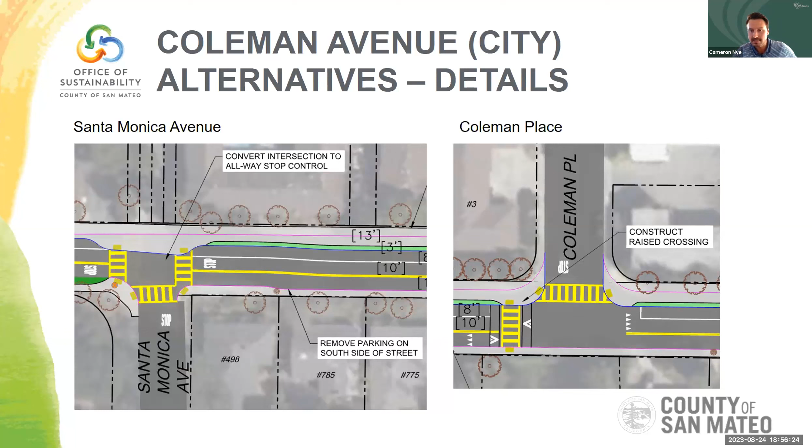Coleman is divided, partly within the city and partly within the county. The same process carried out throughout the city was also done within the county section. I won't go into as much detail on the county side, but I want to make you aware that alternatives were developed there. The two alternatives within the county include one that is a bike lane alternative.

So the street would be widened and Class 2 bike lanes would be provided, and then an asphalt pathway that would meander to avoid as many trees and existing encroachments as possible would be provided on the north side of the street.

And then in comparison, the bottom alternative there is a bicycle boulevard. Because there would be no street widening there, we have a little more space to provide a wider off-street pathway on the left side of your screen. So the difference is bike boulevard versus Class 2 bike lanes, and a narrower versus a wider off-street pathway.

And then within Ringwood Avenue, these cross sections are specific to Menlo Atherton High School, where you have an existing bus stop. Ringwood Avenue does change characteristics from the high school moving further north, but for the purposes of this cross section, there's much more to consider adjacent to the high school, so we use that as one of our focus areas.

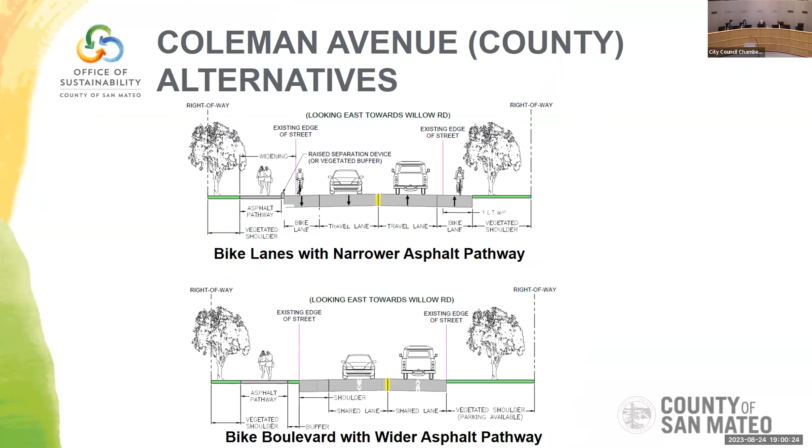Hello, thank you very much for the presentation, it was very informative. I just wanted to look at the map for a moment—not the study map, the map of the area with the very simple view in the beginning where it just had Coleman and Ringwood. You could sort of see them. So I just wanted to ask a few questions.

Because just with this information alone, it's clear that these are really vital corridors for children and young adults going to school. But my understanding is that Laurel is now split between two campuses—that wasn't mentioned, but I think that's on the other side of Willow, is that correct? So there's even more. I think that's worth noting because it provides information that Coleman is critical to that thoroughfare as well, Laurel on one side, Laurel on the other.

The other thing is my son went to Hillview Middle and a lot of his friends lived down by Bay Road. So in addition to the Menlo-Atherton traffic coming down there, there's also Hillview—lots of kids biking to Hillview, starting down in the Bay Road area and biking down Ringwood. So that's another school involved in creating these corridors for bikers and walkers going to school.

The other thing—it's my understanding that Coleman is a thoroughfare as well for school buses, is that correct, the yellow school buses? There's some school bus use of it, and I think also a Samtrans bus that uses it as well.

So speaking to Coleman right now, it's clear that it is a very highly utilized, multi-use, diverse use corridor with a lot of competing uses. And with that being said, I do want to reiterate that the goal of the study was to improve mobility and safety for all roadway users, and it does seem like there are many types that need to be taken into account.

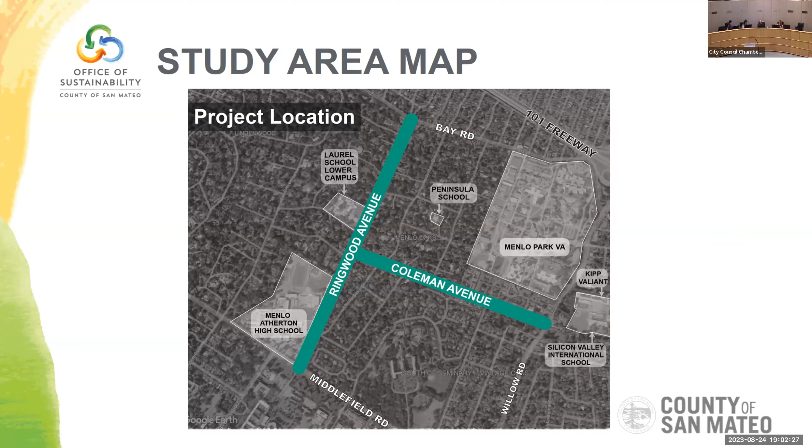I have a couple clarifying questions. When we talk about alternative 2 for Coleman, you use the term Bike Boulevard a lot. How is Bike Boulevard specifically defined other than a normal road? I mean, it's a shared space between bikes and cars. Does Bike Boulevard have other specific characteristics that make it a bike boulevard, or do we just call it that because there's not a bike lane?

Yeah, that's a great question. We actually have a definition in our general plan that we can pull up if needed, but more generally, what we're trying to achieve with a bike boulevard is where bikes and vehicles need to share the space, where they can't be separated or we don't think it makes sense to separate them. We're trying to manage speeds so that sharing can happen more safely. That's why there's quite a bit of traffic calming in here, to bring speeds down so they can still share space, if not separated.

Okay, my next clarifying question. In alternative 2, if the sidewalks get expanded wide enough to accommodate both walkers and bikers, would that be a formal designation, or just de facto allowed because it's wide enough? Would there be signage? Would there be an actual bike path on the expanded sidewalk, or just a big shared space that anyone can use?

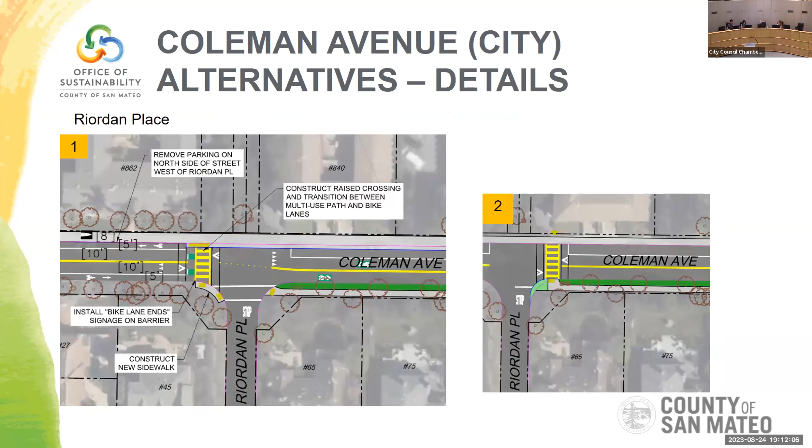So, Ringwood by MA, I noticed on the map of the intersection with Ringwood and Middlefield that there was a green, crosswalk-type marking on the north leg of the intersection across Middlefield. Is that what we're thinking bikes are going to do? No, that's for pedestrians crossing Middlefield.

You're talking about the plans that were attached, page 31. What I'd say is anything shown on Middlefield isn't necessarily accurate, this study kind of stops on the Menlo-Atherton side of Middlefield.

Let me get back to my questions, sorry for taking so much time. This was important, unfortunately not in the presentation today, but in the slides one of the driveways to the school disappeared. There are 3 driveways; there's one next to the tennis courts, and that one doesn't seem to have a crossing in the bike-ped vision. I'm wondering if that was an oversight.

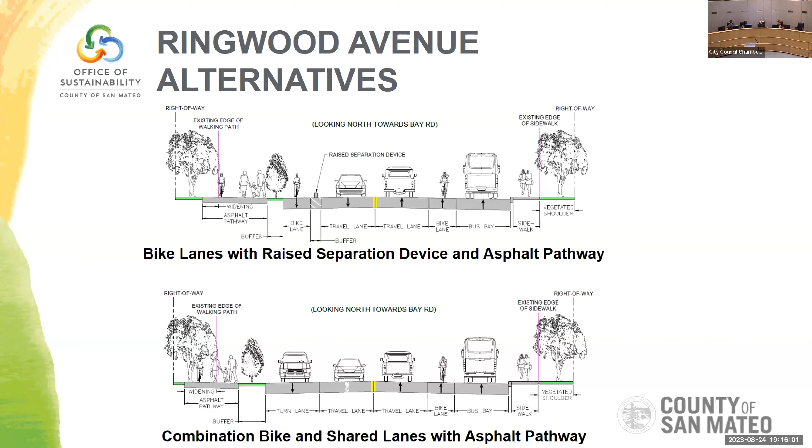I have one question, can you put back the slide at the beginning that had the goals of the project? I was just looking for what I recall was somewhere in there, where we were trying to emphasize looking at the active modes, because I couldn't remember where I saw it. Thanks.

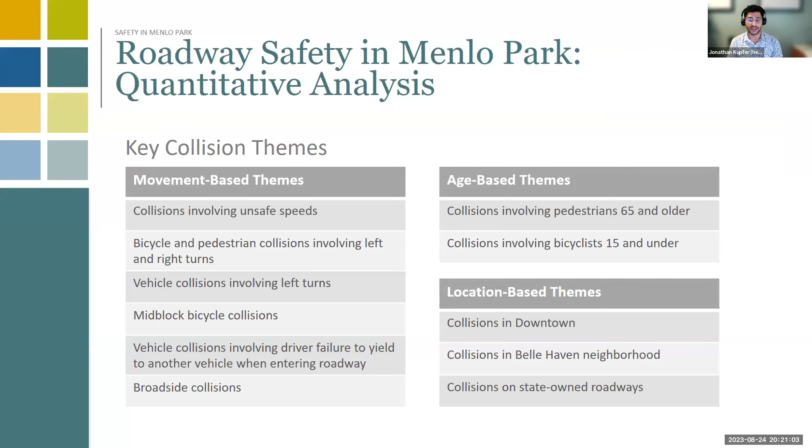From our analysis of collision themes and mapping, we identified a set of citywide emphasis areas to help us organize the strategies we're going to recommend to address these safety issues. This approach helps us be more proactive. So rather than just applying safety strategies to locations that have seen collisions, we can understand what types of locations see different types of collisions, and then identify a set of countermeasures that can be applied to all of those locations.

So what is a safety emphasis area? An emphasis area describes a set of roadways that are similar in terms of use, speed, adjacent land use, or other characteristics. Each emphasis area sees similar types of collisions based on the themes we shared earlier. And because they see similar types of collisions, we can use similar countermeasures—typically design, engineering, policy, or education-based tools—to help reduce the crash risk in that emphasis area.

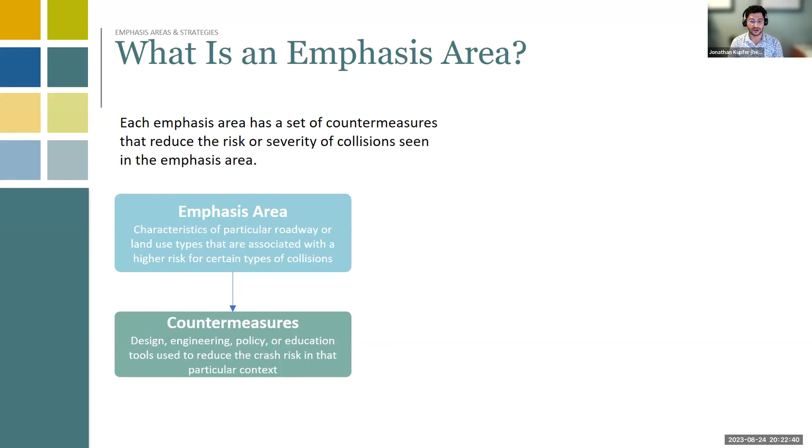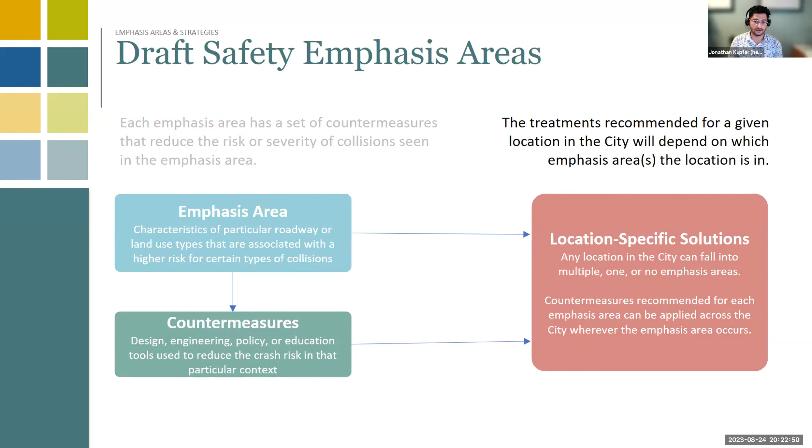The recommended treatments for a specific location in the city will depend on which emphasis areas that location is in. These are the 5 draft emphasis areas identified from our analysis: state-owned roadways, including freeways and El Camino; city-owned higher speed roadways; lower speed roadways; intersections; and school zones, or areas within 1,000 feet of a school.

With that, a question we'd like you to think about is how these emphasis areas sit with your understanding of roadway safety in the city. We'll come back to this conversation after walking through an example of an emphasis area and potential safety countermeasures, but just wanted to plant that for you to think about as we go through this.

So what do these systemic safety strategies look like? We'll start by looking at an example of an emphasis area. Within the emphasis area of intersections, we broke the analysis into 2 sub-emphasis areas: signalized intersections, and side-street stop-controlled intersections, where the minor street has a stop sign but the major street does not, and the minor street has to wait for a gap in traffic on the major street.

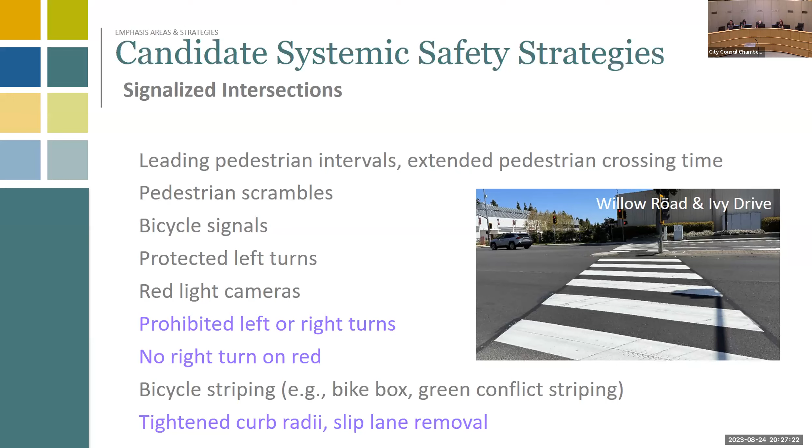This picture of Willow Road and Ivy Drive, which you're probably somewhat familiar with, is a project Caltrans recently installed at the city's request when they were doing repaving work. We got them to do enhanced markings on the crossings as well as buffers on the bike lanes. They also, because they were working there and are now required to by law, installed leading pedestrian intervals on these streets—a nice little safety benefit we can achieve through some of those kinds of strategies.

Unsignalized intersections—we have lots and lots of them. As Jonathan mentioned, one area we do see as a potential focus or emphasis are places where we only have a stop sign on one street but not the other, so side street stop controlled. We have many, many of those throughout the city, and very long corridors that you're all familiar with where we have a lot of those. So we can do a number of different things there.

I picked an all-way stop example here, which you're all familiar with because we spent a lot of time talking about it recently—the quick build we did at Menlo Avenue and University Drive, right by Drager's, which is still out there and we're still getting feedback on. There are things like this we can do that involve removing a turn pocket and reducing the turning radii a bit to slow people down as they travel through here.

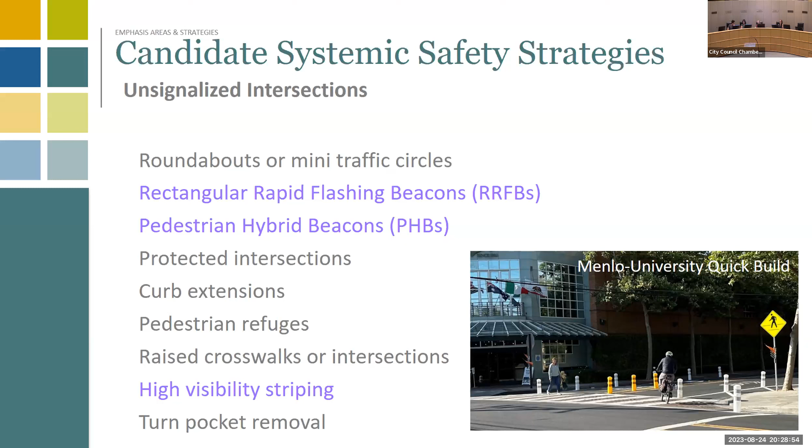We also have around town a lot of these rectangular flashing beacons, like right out here by the library, but also up and down Santa Cruz and in a number of other locations. Then there are more aggressive things we can do, like for bicyclists, a protected intersection where you're completely separating the path of travel for folks—quite a few different things we can do there.

And then the last set of examples I have for you are corridor-based examples, like our Middlefield Avenue Safe Streets pilot project that's been installed now for a while.

Again, it kind of happened pretty quickly, but we've talked about in this venue as well, where we removed a travel lane in each direction, replaced it with a center turn lane and buffers on the bike lane. So that's what we traditionally call a road diet.

So fewer lanes. We can also do things like narrowing the width of those lanes, some of the traffic calming bike boulevard stuff we talked about earlier today. And then other things, like separated bikeways or medians that direct how people can travel through and things like that. So those are all kind of corridor types of strategies.

Running through these quickly, the objective tonight isn't to start to talk about these in a lot of detail, although we're happy to have any conversation you all would like, but just to let you know that there's a broad set of tools that we have available to address safety, and these are some of those.

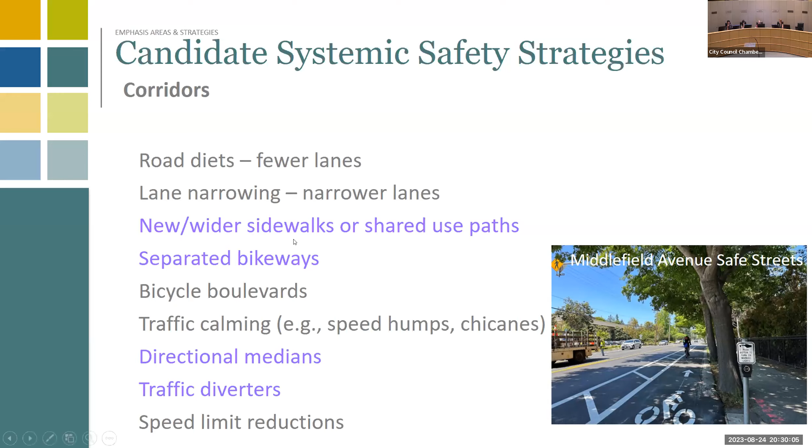And then I'll just kind of speak quickly about the community engagement we've been doing to date. Chair Cebrian, you mentioned this already, but we have been out there talking to folks in a variety of venues, and just to help provide some information, what are we trying to do with this engagement process?

Obviously, in any engagement process, we're trying to reach - this is a citywide effort - we're trying to reach people across the entire city, but we are trying to really focus as much as we can on people who are particularly impacted by collisions, and so to the best of our ability to really find and reach those folks. So we're using a variety of strategies for that.

One of our goals is to make sure people understand what this is and what its purpose is. I spent a little bit of time walking through why this is different, and building an understanding and awareness of that difference is super important to me personally, because I want all of you and our leadership in the city to be able to articulate why it's different and why that's important, because that will help us shift how we talk about safety and how we address safety in the city if we really want to make this meaningful difference that we're trying to make.

We obviously want to represent the entire community, all the different voices that are out there, and we want people to see that their input matters as we work on this plan. So how are we doing that?

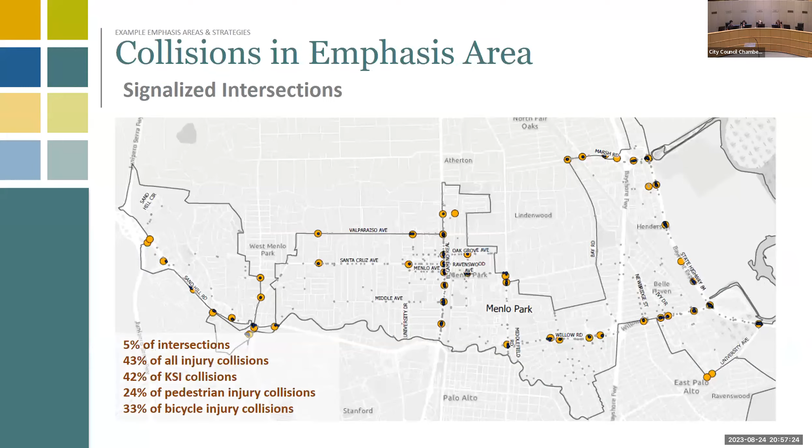I was looking at this map again and want to emphasize and second this idea that sometimes you're just lucky. So one of the serious injury accidents happened in Linfield Oaks, where there really haven't been a lot of injury accidents. It's at an intersection that doesn't have a big circle of a ton of accidents. It just, that was a bad day for somebody.

I did notice in the Fehr & Peers presentation that was in our packet that weird section around Menalto and the Willows where every single intersection's seen a little bit of action was included, and I didn't see it on your map. I wondered if that was just an oversight.

Yeah, that's a good point. I don't know if we included it in the high collision corridors per se, as much as in the thinking about it as an emphasis area. It's not like a corridor, but it's sort of like you said, it's a bike shed for kids going to Laurel. It's really this weird thing where every road, every intersection has one, or some have more than one.

So it's happening everywhere, but it's not happening consistently everywhere. It is, in a way, the definition of a systemic problem, where we need to think systemically about how we address it.

So yeah, it's definitely an area we didn't go through everything today. There's a lot of information, and we've been focusing on a handful of, I don't want to say focus areas because we already have emphasis areas, but geographic areas within this. So in addition to the emphasis areas, we've been highlighting Belle Haven, where there's a unique concentration, the Willows, where there's a unique concentration, and downtown, which also has a unique concentration beyond the corridor look. So it is definitely on our radar.

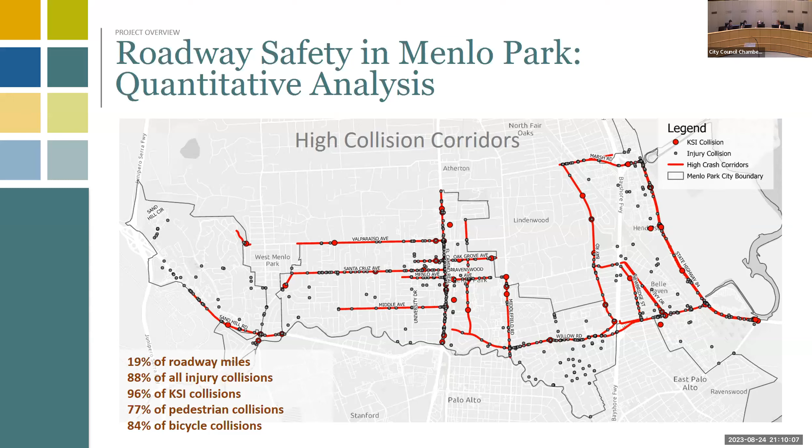Does anybody have any more comments on this item? Okay, well, thank you so much for that presentation. I look forward to seeing what happens next with it.

I think we are to recommend to City Council to approve the Complete Streets Commission 2023-2024 work plan. Kevin Chen, Senior Transportation Engineer, can you introduce the item, please?